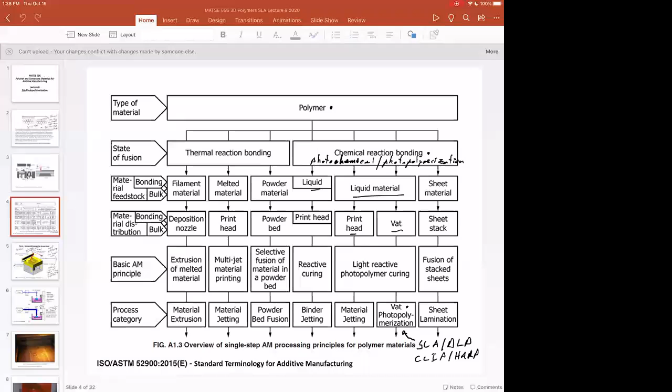So we started VAT photopolymerization last time. Remember where VAT photopolymerization lies on the ASTM diagram. And of course, we're going to call this SLA once in a while, or you'll hear DLP, or you'll hear CLIP or HARP if you look up Azul. There's lots of interesting ways that people are approaching this, but we're using liquids and we're using light reactive photopolymer curing. That's the thing that ties this whole section together.

So we watched a couple of videos last time. We'll watch a couple more videos this time, getting oriented to what this topic is. But this is now the type of chemistry that you should at least be conversant in, in order to understand what we're doing here.

And this is the same or similar to polyjet. We talked about polyjet printing or material jetting in terms of the Stratasys or Objet technology for that. So this is very similar UV activated acrylate photopolymer curing.

Rather than discussing TG and TM and the thermal transitions of the polymers, what we're going to talk about is this idea that you can go from liquid polymers or liquid resins, you shine light on them, they undergo free radical polymerization, and you eventually end up with a solid. Because in general for organic materials, unless they crystallize, or unless you're talking about crystalline small molecule organics, liquids will be low molecular weight, and sometimes we also call them oligomers.

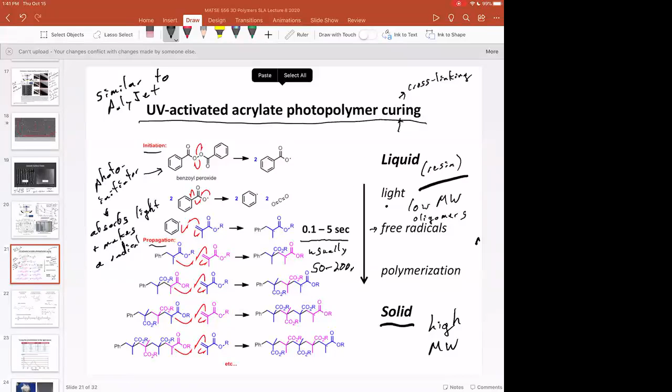And in order to do effective vat photopolymerization 3D printing with this chemistry, this has to happen quickly, usually 50 to 200 milliseconds. That's all the light is on for, and we'll see some... oh, hold on.

Well, Zoom is having issues today too. Let me go back. All right, let me try this. Oh, let me share my screen first. Well, this might be an interesting talk without any slides. Let me see if I can get back to what's going on. Maybe it's a PowerPoint issue. Bear with me.

Okay, one more time here. Always something new. All right, screen broadcast is going. There's the PowerPoint. Okay, well, must be one of those things. But anyway,

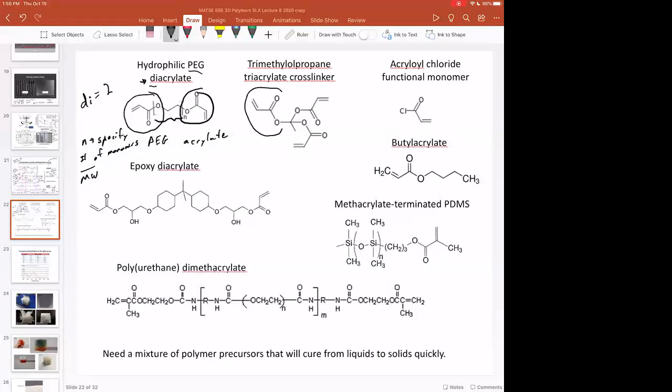So here you have a triacrylate, and anything that has more than 2 functional groups on it is going to cause a lot of cross-linking. You get cross-links with diacrylates too, because you grow polymer chains from both ends like this. But you're going to grow lots of polymer chains. They're going to come together and cross-link polymer chains together in the network. So we tend to call those cross-linkers.

And you see the molecular weight in the center here is not very high. So this serves as a gelation center or as a cross-linking center for whatever chemistry we choose.

Here's, well, acryloyl chloride is special because it doesn't look exactly like an acrylate, but that chlorine functions a lot like the oxygen. So that's a functional monomer. Butyl acrylate right here, it's the same thing. Epoxy diacrylate, this thing right here, comes from epoxide ring opening, so that starts to look like epoxy.

You have silicones, so PDMS is silicone. And then you also have a lot of different methacrylates. Methacrylates have this methyl group right here. We're not going to go deep into the polymer chemistry, but methacrylates react a little bit more slowly than acrylates do because that methyl group slows things down a little bit.

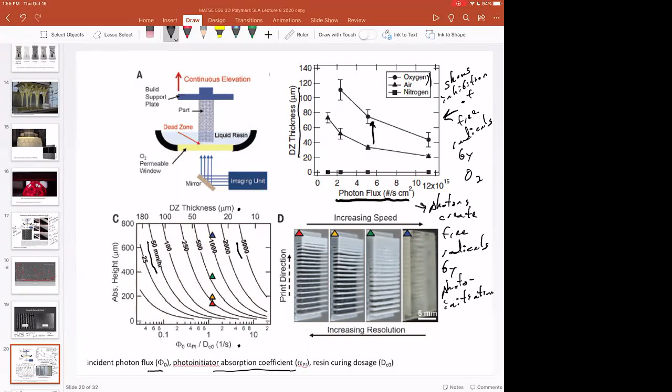The photoinitiator absorption coefficient is related to how many of those photons are going to be turned into free radicals. Because just because you shine light on something doesn't mean you get any free radicals. You have to absorb that photon, that photoinitiator needs to break apart, it needs to form a free radical. There's an efficiency that goes along with that. But you have your highest photoinitiation efficiency where the absorbance of the molecule is the highest.

And so the other cool part about photoinitiators is you see that the max absorbances can move around. And you know that you can tune lasers or laser diodes to match photoinitiator absorbance.

So that's very interesting. If you have an SLA printer, say with a purple-violet diode that illuminates at 405 nanometers, you just need to find a photoinitiator that absorbs at 405, or at least close to it. Maybe 384 is close enough, although you'd have to check it out.

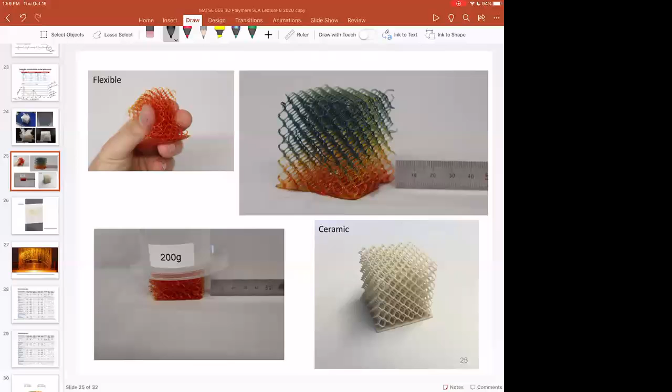So these are just some examples, so you can check out these. These examples are from my lab, where you can formulate flexible resins, you can formulate ceramic resins, you can do lots of different stuff. You can even add additives. If you want to check this out, this is a photochromic where you shine light on this, and I think Locke might have made this in my lab, but this is cool because you can do lots of different things with these resins.

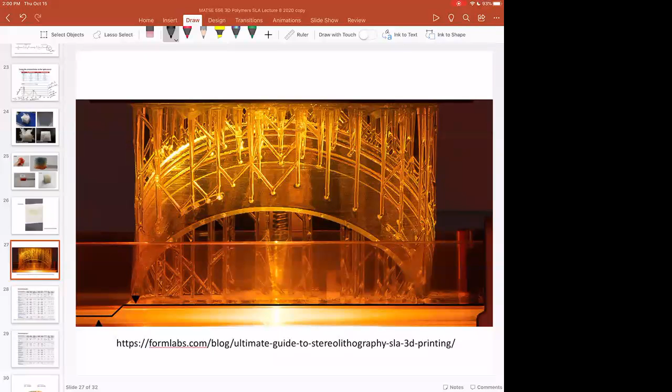And so we're going to talk about these resins, and there's lots of good guides for how to do SLA printing and what's available from industry, because these resins in some cases are difficult to formulate. New resins are difficult to print on whatever SLA technology you have, but it turns out, just like we studied 10 or 15 different polymers in the thermal polymerization, in the thermal 3D printing part of the class, there's at least that many resins, if not dozens of resins that are available in the marketplace for SLA. So you can check out the online guides.

And one cool thing about this is if you look up what's available for 3D Systems SLA printers, they have a really nice section on all the different strengths, hardnesses, etc., heat deflection temperature, which of course is not quite the same thing as TG, but it starts to get related to TG for their stereolithography setup. And they sell these resins under designations like ABS Light. So there isn't a single molecule of ABS in any of these resins, but the properties of these resins that are made using photopolymerization, the hardness, the modulus, the flex, etc., is similar to ABS.

And lots of people are familiar with the properties of polycarbonate or ABS or polyethylene, etc. We sort of have a sense, if you've worked with plastics, you have a sense for what the properties of those thermoplastics are like, because we use a lot of thermoplastics to design parts right now. But when you get into UV polymerized resins, it's difficult to say that this is an acrylate polymerized resin that has a mixture of a few of these different monomers and the properties are like this. You really want to compare it to things that people know about. This is silicone-like, or this is polyurethane-like, or ABS-like.

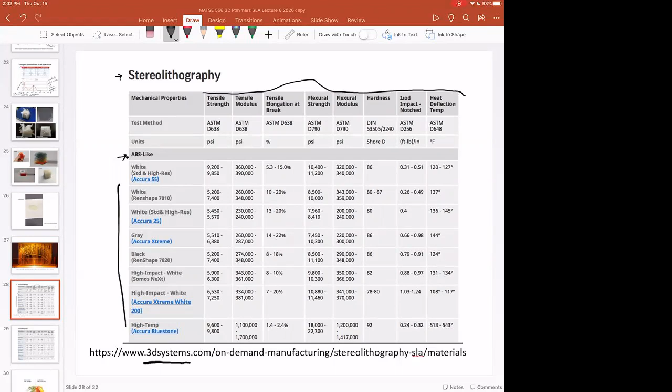And so what these 3D printing companies have done is they've really tried to build families of resins. So you can see all the different types of resins here that have similar properties to ABS. They've really tried to benchmark these to thermoplastics that folks are familiar with. But all of these are different liquid resins. They probably have 20 or 30 different components, and we'll talk about a lot of those different components other than just the oligomer mixture. And they have the validated properties here, so you can do your material selection.

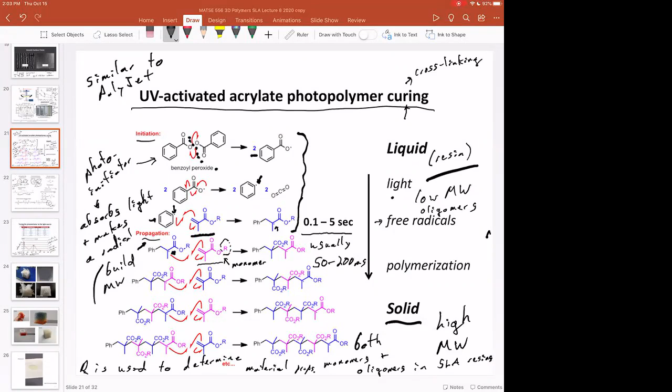So this is polypropylene-like, polycarbonate-like, polyethylene-like. That's really interesting - they're selling these cross-linked photopolymer resins described to be like thermoplastics, because we don't really encounter a lot of these types of materials, acrylate polymerized cross-linked resins. It's hard to describe what their properties are other than maybe silicones, which are usually cross-linked, and epoxies, which are cross-linked. So my message on slides like this is don't get confused. We're not going to have oligomers of polycarbonate, polypropylene, or polyethylene. We're not using acrylate photopolymerization to polymerize polyethylene or polycarbonate. We're really using other chemicals as a stand-in to give us properties that are like things we're familiar with.

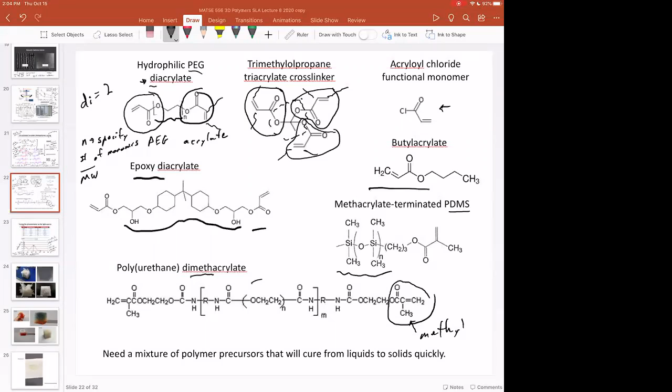And the exceptions are PDMS, silicone - we have to use silicone, but we can make PDMS oligomers, and some types of epoxies and polyurethanes. As we investigate different types of SLA materials and look into the recipes for a lot of these compounds, you'll see things that start to look familiar. But we're not making polypropylene or polymerizing polypropylene using photopolymerization - it's a stand-in. So I hope that was clear. Are there any questions on that?

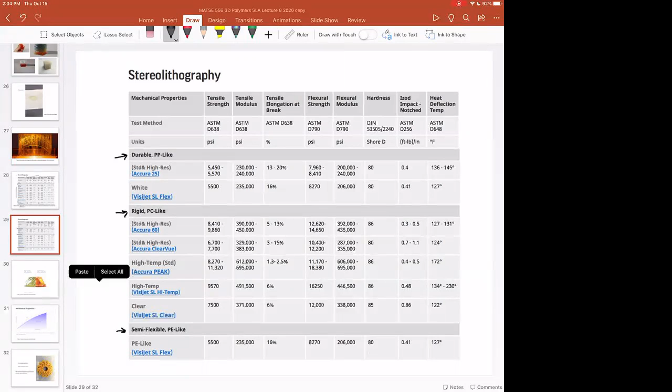For those of you interested in the details of the materials, we'll get there, so hang on, but this is just setting us up here to understand the ecosystem of that photopolymerization. The other thing we're going to talk about is post-processing.

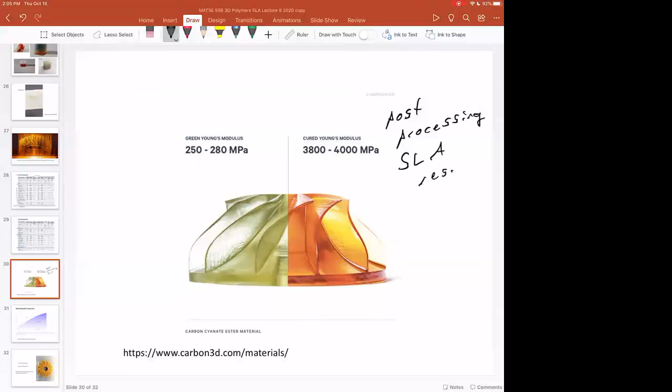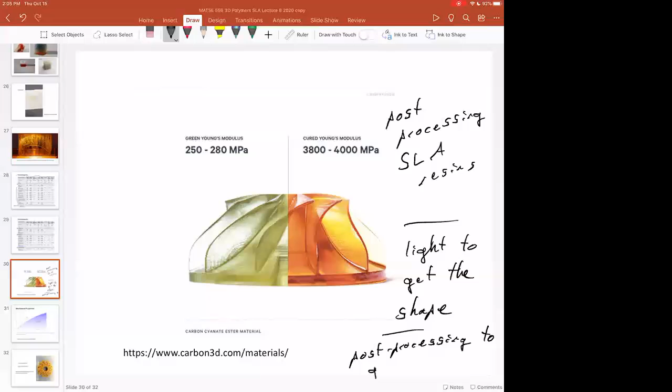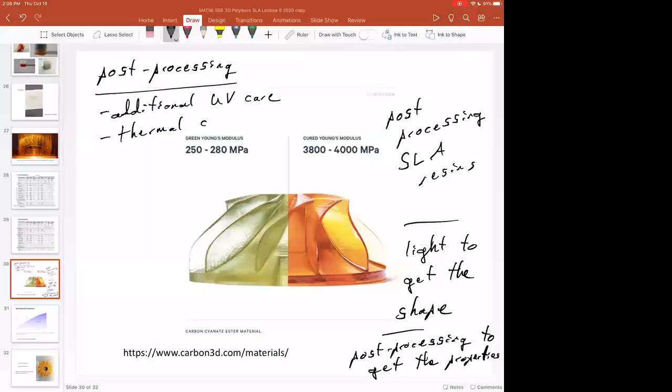And so what Carbon always says is that you use light to get the shape, and you use post-processing to get the properties. And post-processing can be additional UV cure, thermal curing, washing, etc., a combination of the above. And this is one really nice example right here from Carbon's website.

So they're using what's called a cyanate ester. We'll talk in detail about this chemistry because it's known, but what happens is they take this cyanate ester - this is the green part, so this is after UV. After UV, we have a green part, called a green part because it's still green - not treated like green wood or something, or a green body of a ceramic. And then this is after thermal. The UV photopolymerization that we just talked about activates all the acrylates and allows us to shape a three-dimensional object using acrylate photopolymerization, just like any SLA process. When we thermally cure the process, we take that shaped part, put it in an oven, and the thermal cure activates the cyanate ester chemistry that's not UV active.

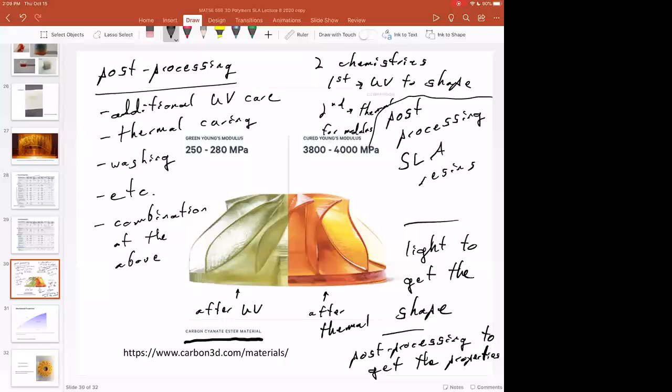Why people are interested in cyanate esters is that they have very similar stress-strain curves to GFN, which is glass-filled nylon. Glass-filled nylon is an automotive material - they put the glass filler in to decrease water absorption and increase strength, but it's an engineering material that people are interested in. Here you see strengths on the order of 100 megapascals and reasonable strain to break, although relatively brittle because cross-linked materials are in general going to have low strain to break.

Any questions on this before we move on? Like I said, we'll come back to this and talk about post-curing and dual cure materials, but I want to introduce the concepts to get people thinking about these things as we go forward. Any questions or discussion points? All right.

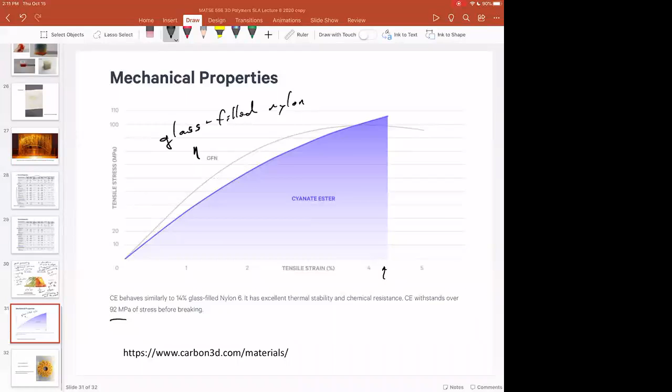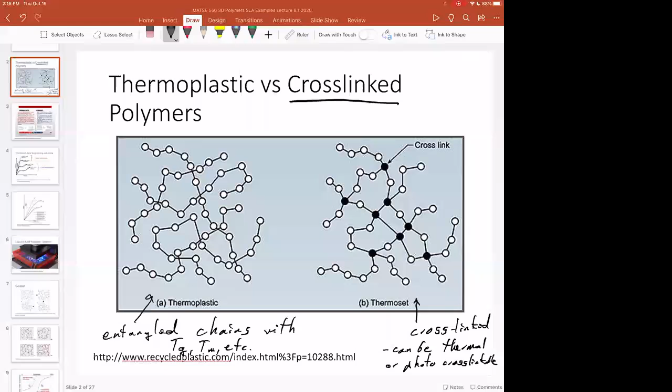And so these cross-linking reactions can be thermal or photo cross-linkable. Just depends on what chemistry you're using and how you're going to tune that reaction. And so we're going to talk about how that process occurs.

So in general, thermoplastics are finished polymers. They're made at a chemical factory and they're processed into pellets. That's the standard for injection molding. It's the standard for blow molding. We've talked a lot about thermoplastics and how they work.

There's a lot of thermosets out there, especially like epoxy thermosets that you are probably familiar with. Lots of thermally cured silicones are thermosets as well, or RTV. So if you've ever used an RTV silicone or an RTV polyurethane, that stands for room temperature vulcanizate—that's a type of thermoset. As a matter of fact, rubber tires are thermosets as well because they're cross-linked. And so there's just a different type of how the chains are interconnected, and that can lead to different properties.

And of course, the big issue with thermosets is that they're difficult to recycle. You can't remelt them. You can only grind them up and recycle them as a ground polymer powder. And that's actually one of the biggest disadvantages of rubber tires. As you know, it's really, really hard to recycle tires. We tend to grind them up and make athletic tracks out of them or playgrounds or something like that. But there's only so many athletic tracks that we can make, and there's just massive tire dumps. It's a big waste problem that hasn't been addressed. But anyway...

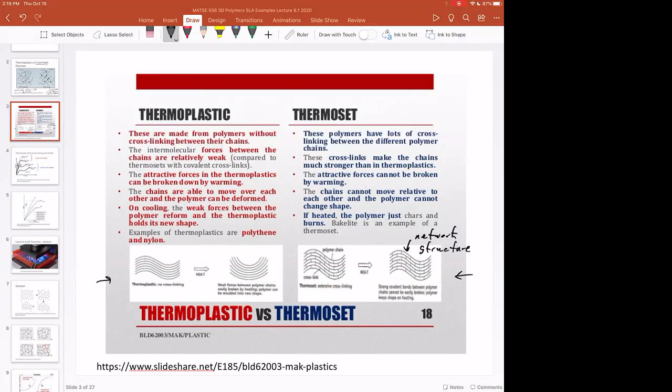And so that leads to a longer strain to break, or higher strain to break, in thermoplastic materials. Whereas thermosetting materials, because of the cross-links or because of this network structure, those chains can't slide past one another. That's why they're called thermosets, and that's why they can't be recycled. They tend to be more brittle materials and tend to have lower strain to break.

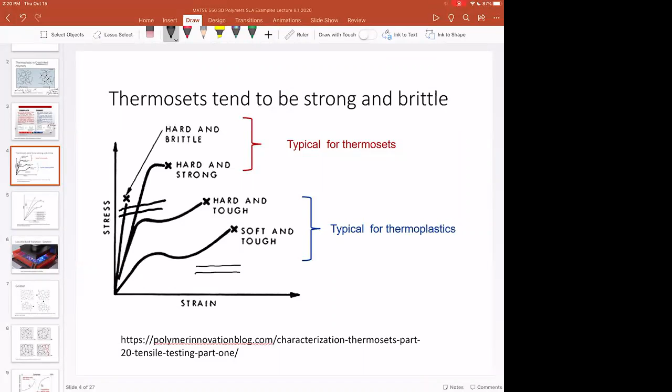So of course you can adjust the oligomer recipe in order to get flexible thermosets, and we'll talk a lot about flexible materials. But if you compare apples to apples, similar chemistry between thermoplastics and thermosets, the thermosets tend to be more brittle. But you can't shape thermoplastics in general at room temperature and get things you might like to use in engineering applications. And so you can do room temperature processing of thermosets and get engineering parts. It's a trade-off, just like any sort of engineering design or material selection problem. You need to know the different aspects of the different materials and then make your selection that fits the requirements.

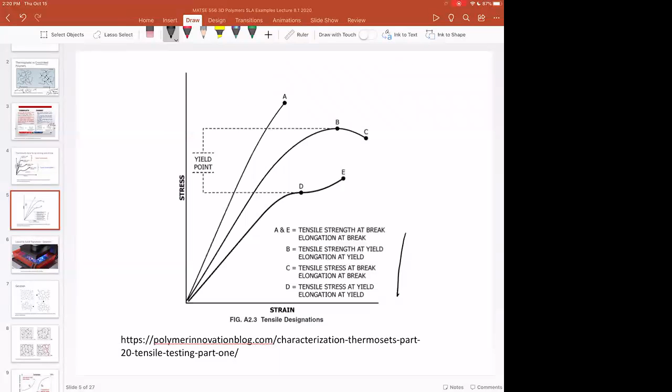And so if you haven't studied a lot of mechanics of materials, or haven't studied your mechanical properties recently, this just defines strengths, elongation to break, yield, etc. These are just some vocab words you might be interested in having in your nomenclature, so you know what all these properties are on the stress-strain curve. So that's just an aside.

I'll pause here. Are there any questions?

Okay, we're going to watch a couple videos because there's a couple things that we missed in terms of describing the different processes. One of them is this video, and we're going to see exactly how this printer is operating in terms of the raster scanning to write the different structures. We'll compare that to a DLP carbon type printer where you see the whole layer being illuminated at once. So let me see if Zoom will cooperate here and allow me to show this video.

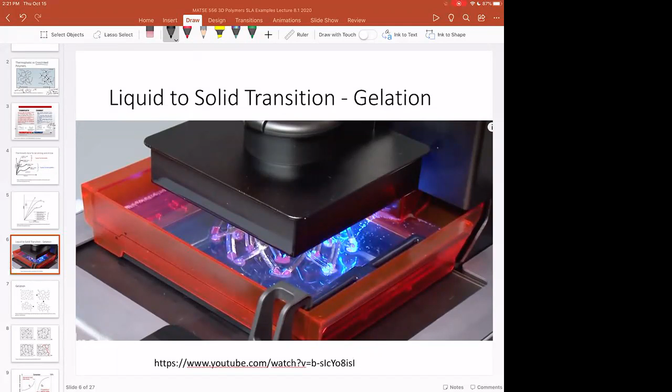So first we'll talk about the Formlabs printer. There's a couple key features of this. If you've never seen a Formlabs printer working before, this will give you an idea of what's going on. So let me start this video here.

From CNET, this is a first look at the Formlabs Form 2 3D printer. This is the second version of a printer that was initially conceived and funded from a Kickstarter campaign.

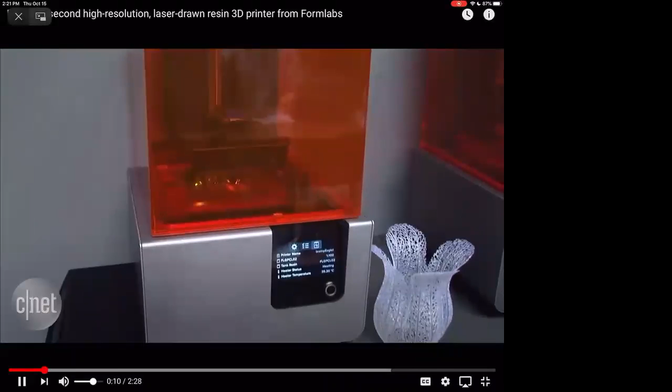Okay, so the first thing that you see is that you see the light moving around on the print bed, and that's the raster scanning. So even though there's some reflection and some smearing of the light, this is a point source laser that's about 300 microns big in X and Y, and that's moving around, drawing in the different components of this part. So that's one thing to pay attention to.

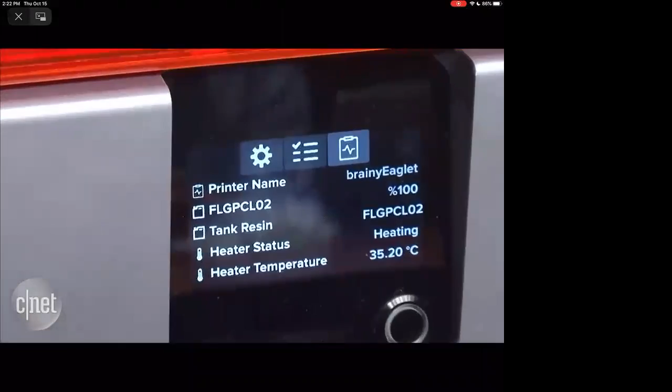Back in 2012, the company was founded by a couple engineers and designers from MIT who raised $2.8 million to build the first.

So the second part is you just saw the printer lift up the part from the window because this is bottom illuminated. It's going to wipe the window. It has a wiper to make sure it's nice and clean and there's nothing sticking there. And then it's going to put the part down exactly 100 microns away from the window to allow resin to be now between the window and the part, to illuminate the next layer.

But today, thanks in large part to the feedback from the Kickstarter community, and of course years of research and development, Formlabs is back with the Form 2.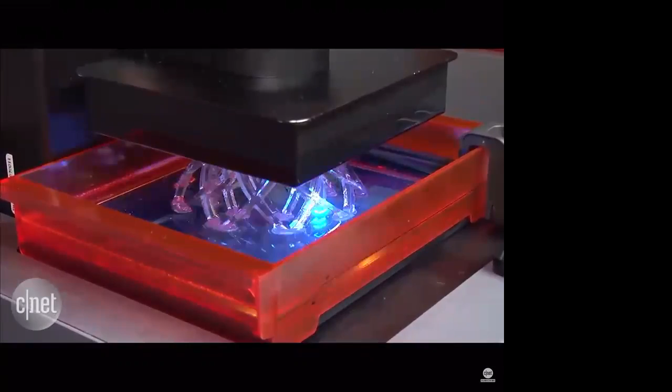Now this one is very different from most of the 3D printers you see on the market. Okay, and now you just saw the tray slide. The tray slides first before the part is lifted off to break the suction at the interface, and then it'll be wiped, and then it'll start again.

So let me just back up a second here. You'll be able to see all the different stages of this wiping, writing, and sliding of the tray to break the suction.

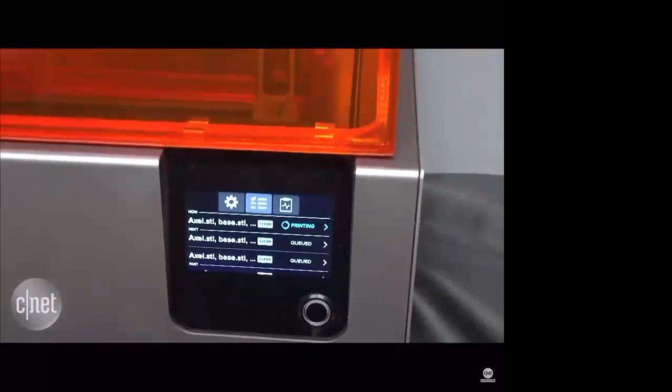Those models operate kind of like 2D printers, but instead excrete molten hot thermoplastics from an actual print head. The Form 2, however, continues Formlabs' stereolithographic model. Stereolithography was actually the first 3D printing technique to be invented, and it uses a Blu-ray laser that traces part of the model image onto the surface of a bed of liquid resin.

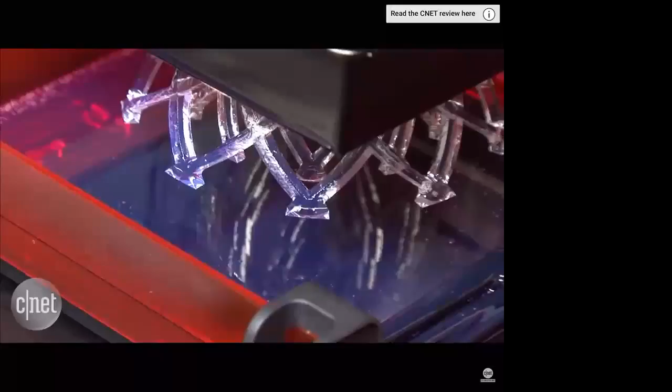As complicated as that sounds, I checked out an early look at the model at a briefing last month with the Formlabs team, and it's actually a very simple process for the consumer. You just unpack the printer, install the removable print tray, and insert one of the new resin cartridges directly into the machine like you would any ink cartridge on a 2D printer.

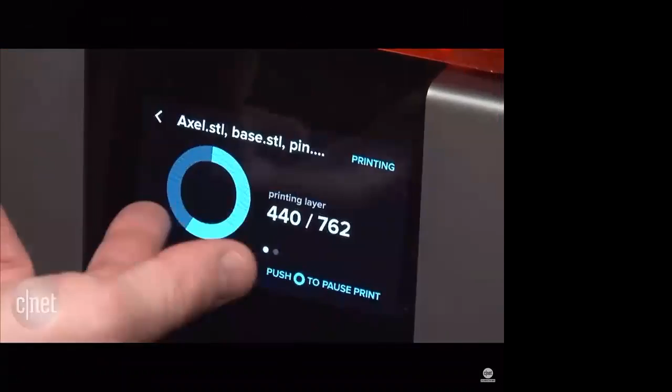The new model even adds a touchscreen display for managing print jobs and a Wi-Fi connection that'll automatically send progress updates to mobile devices, in case you want to step away from the printer for a while, or if you're planning to share it amongst several users.

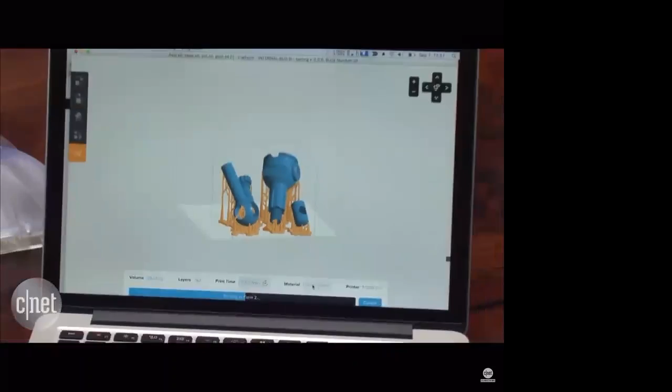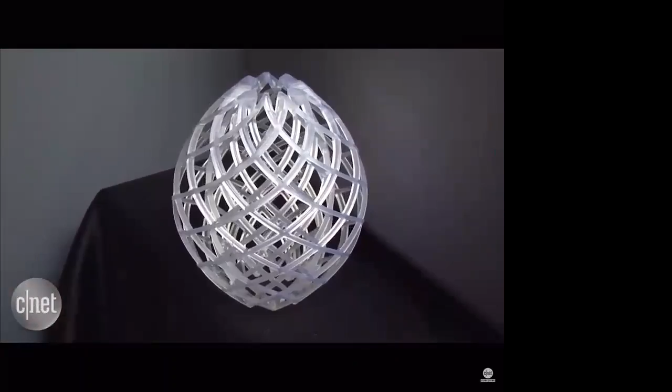So why stereolithography? Well, one thing is that these printers can add a level of detail that standard fused filament printers can't, whether you're printing something big or something super tiny like a ring. The ultra-high resolution also does a good job at hiding the individual layers of plastic from plain sight. You can barely even see the lattice pattern formed by the plastic layers, which really makes it seem like the objects were cut from one solid piece of plastic.

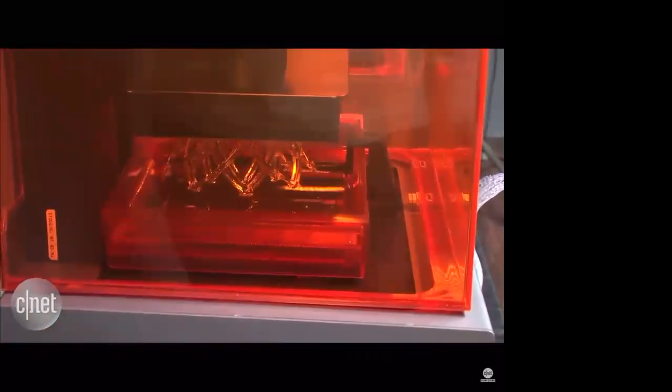You can buy the Form 2 right now for $3,500, which includes the 3D editing software, resin, and a finish kit for post-processing. You can read more details about the upgraded Form 2 in the full first take, but that's going to do it for me.

Okay, so we have that printer, and that's very interesting. Let's compare that to the short video of the Carbon printer to give us an idea, especially how the different printing routine works in terms of what the printer looks like as it's printing. So let's see how this goes. I think there's a little talking, and then they'll show some prints.

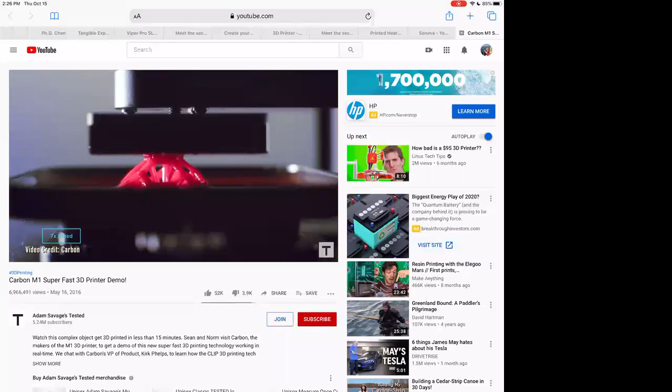Hey Sean, you remember that video that made the rounds on the internet last year from TED about 3D printing? The CLIP technology, from the company Carbon? It was a video of a piece being printed out of resin that basically looked like it was just coming out of the resin, like super speed. Oh my God, and even though it was time-lapse, about 7x, it was much faster than any of the 3D printing technologies we'd seen before. Yeah, it seemed like black magic.

Right, and well, we are here at Carbon where we're going to get a demo of their actual machine, the M1 printer. Super excited. Me too. Let's go check it out.

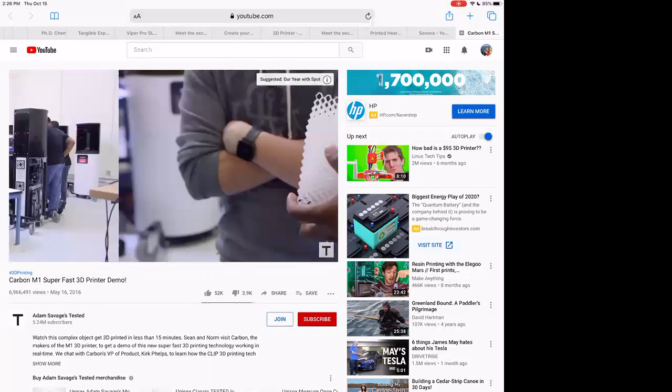Hey Kirk, it's great to meet you. Nice to meet you, we're very excited about this. So this is it, this is the M1. Yes, our first product. And it uses Carbon 3D's CLIP technology, which we saw videos of online. Yep, it's gone everywhere. Can you describe a little bit about what's going on, what the machine encompasses, and how it differentiates itself?

Okay, so what you can see in this is that the light is not flashing like it does in the Formlabs printer, or raster scanning, so it's not moving around. This is a total 2D exposure. And even though this is sped up a little bit, this shows that there's no wiping step. You get a relatively smooth pull of the part.

So this is cool because they're showing it in clear, and the image is changing in the projection here. That's, of course, how you change the part. But this is a lot different physics of the process compared to what we saw with the Formlabs printer.

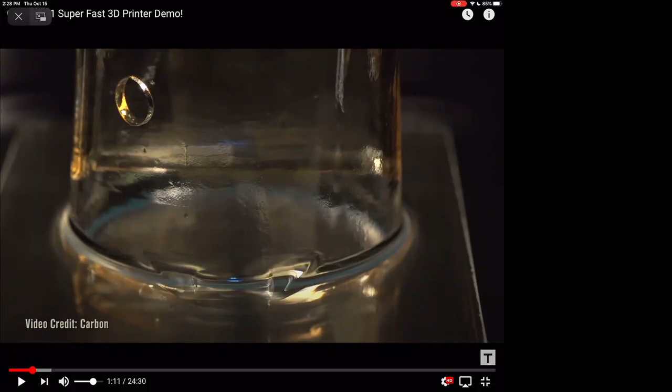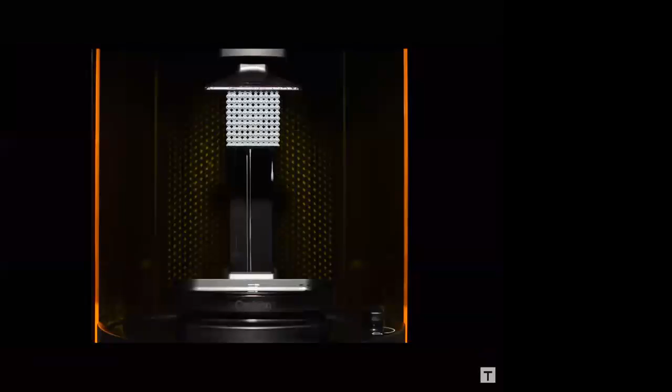From other printers that use resin? Sure, so our technology, CLIP, for Continuous Liquid Interface Production, is a fundamental advance in 3D printing. And what it allows is for us to print very fast, without layers, in engineering materials. So all that together allows us to work with people who want to make real parts for production, as opposed to just for prototyping. Right, which you can do also, prototyping.

Correct. So continuous printing, how does that happen?

We've seen SLA printers where a laser goes layer by layer, and then there's a scrape process, and over many hours you get an object. SLA has existed for 30 years, and it's great for prototyping. Our founder looked at SLA and realized there was a bug that could be a feature. He realized you can get rid of layers if you control not only light, but oxygen and light together. Up to this point, the SLA industry has thought of oxygen as the enemy, but if you make oxygen your friend, you can remove those layers and go much faster using a wider range of polymer chemistries.

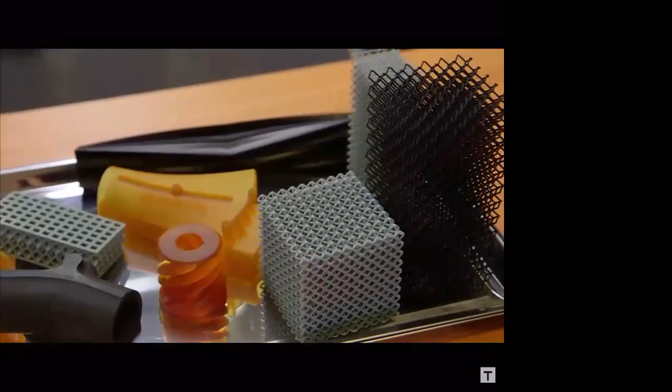Oxygen is something that inhibits the curing of resin. A light turns your liquid into a solid, and oxygen prevents that from happening. If you use sophisticated software to modulate the effects of both together, you can make amazing parts. We're using UV light, the same UV light used in other SLA approaches, but it's the combination of light and oxygen that allows this magic to happen.

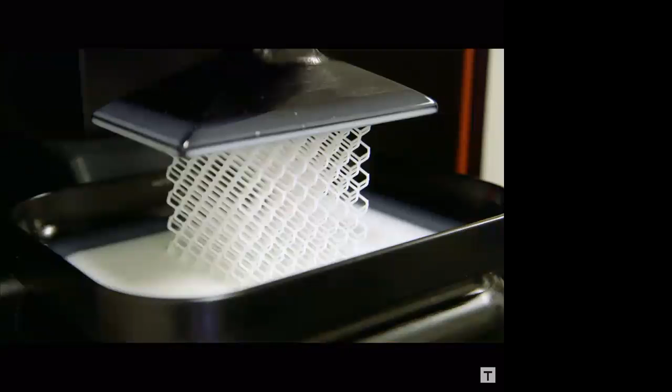To do it continuously, are you drawing the outline of the print, or is it all at once? Underneath, down in the cabinet, we have something very similar to a high-performance desktop projector. We're projecting an image, like playing a movie. We take your three-dimensional structure, take its cross-section, and project that cross-section into the bottom of this liquid vat. Then, controlling both the light and the oxygen, you can get rid of those layers and make awesome parts. So it's basically like a DLP projector.

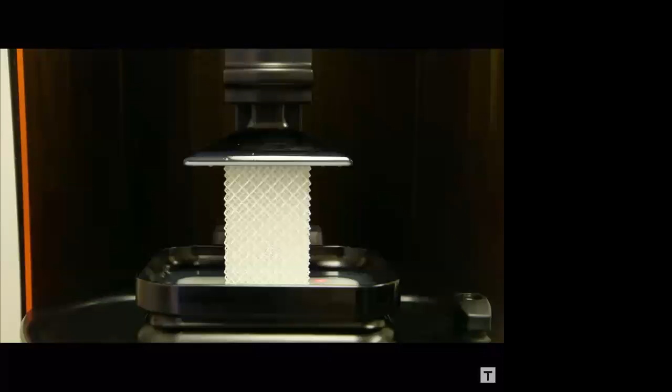That's exactly right. The software still does slicing of traditional models, so you think of it as a cross-section like you said, but instead of drawing the outline or the infill, it's just projecting that all at once. Does that also inform the bed size?

We are launching M1 to get CLIP out into the world, because we've got engineers, designers, and business people who want to use 3D printers to change the products they make and the businesses they run. Imagine you want to get rid of your spare parts warehouse, all these plastic parts just hanging out waiting for someone to need a spare part for your 2006 Toyota Matrix, which is the car I drive. That's a bummer, having to hold all those spare parts in inventory waiting for Kirk to call when he needs a new door handle, which is a problem I had just this morning.

So instead, what you want is a production quality 3D printer that can make that part at an appropriate quality for me to use in my real life. That's what this machine is about, and we're really excited to show it to you today.

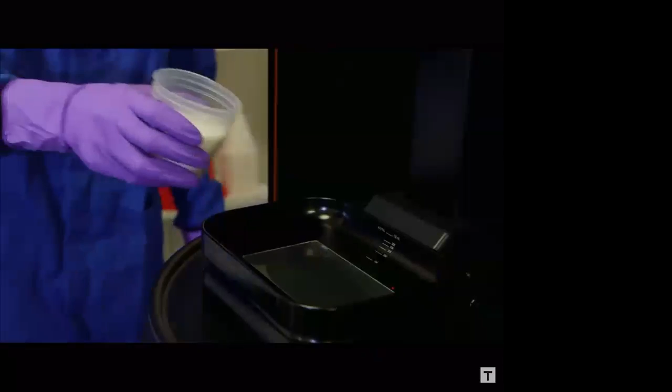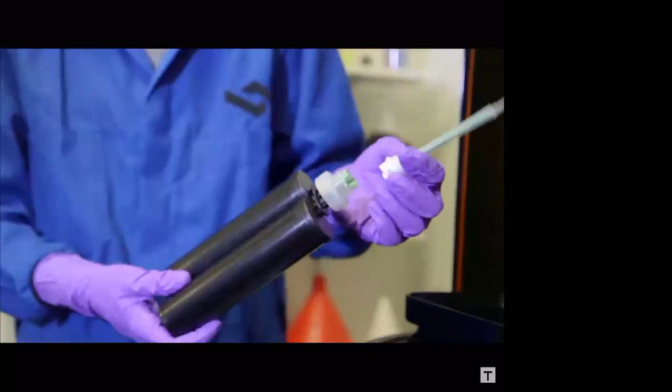I think the best way to illustrate it is to actually get the demo started. The resin you have going here is your prototyping resin, which is the fastest printing one. We have a wide range of resins, some for final parts and some for prototyping. When people are making real things, they go from concept, an idea, to a final product, and along that process there are many different resins you might want. You might prototype first, then understand the model and its geometry, then go to production in a high-quality engineering resin.

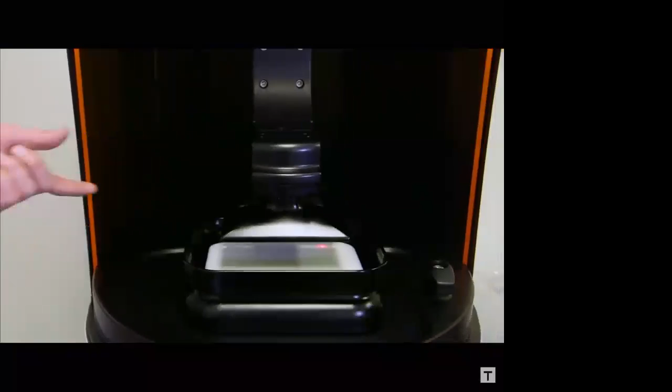So what's happening right now: this is the build platform, and it's descending into this liquid puddle of resin. The light, when we get down to the bottom, will project into the bottom of this pool of resin. Think of this as a small fishbowl, a container of liquid with a transparent bottom surface. We're going to project through that transparent bottom, and using our physics and chemistry model, control the oxygen and its interplay with light. Now you can see the build platform has descended into the pool, and underneath, our optimized projection system is projecting UV light into the bottom, projecting the cross-sections as we build the object.

So the object is being built right now. You just can't see it because it's underneath the surface of your pond of resin. So Kirk, this is super exciting. Yeah, and this whole process with this model and this material is going to take about 15 minutes, you said.

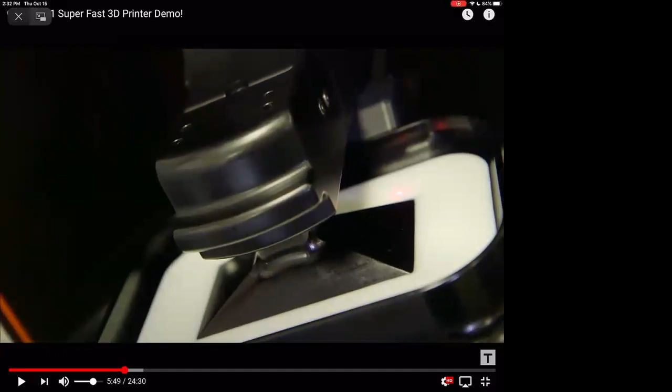I'd love to use that time to ask you more questions about the technology. Great, let's do it. Okay, so you can check out the rest of that video, but that gives you a lot of interesting information on what carbon is all about.

Oh, I don't know what's going on here.

What carbon is all about and how their technology compares to other SLA or photopolymerization type technology. The rapid printing has been figured out. What carbon is really good at now is the different materials, because they're polymer chemists with a polymer chemistry focus, they're good at using different oligomers, formulating different materials and getting really desirable properties. We'll talk about that as this PowerPoint slide comes up.

Let me see if I can get this going. One sec, bear with me.

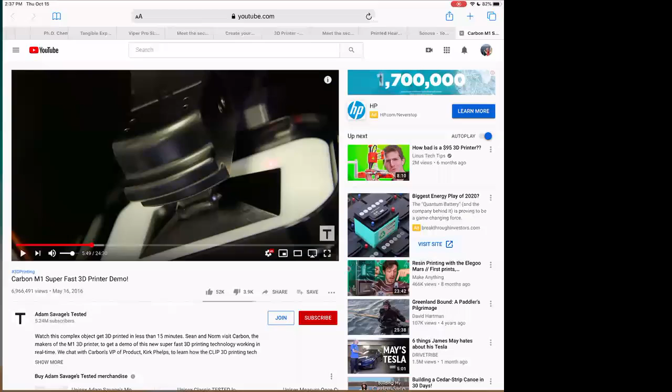We'll cover that next time since this PowerPoint isn't coming up. I want to show this video from EnvisionTEC about applications and what you can do with SLA, from one of the application notes. We'll talk about different applications for 3D printing technology as we go further. This was a nice complement to thinking about what we can do with 3D printing at large scale. Let's watch this video and see if PowerPoint comes back to finish the class. This shows you what you can do now with a 3D printing factory and how it's transformed an industry. Let's check this out.

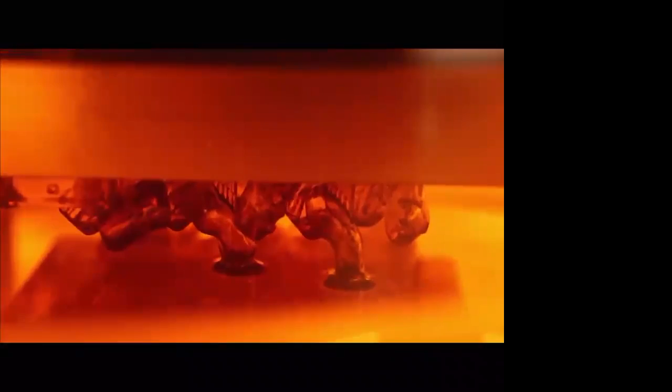It's great to help people hear better. Sonova is the largest hearing healthcare provider in the world. From this facility, they serve Phonak and Unitron brands. There are over 500 employees; it's a lean manufacturing facility. At Sonova, we envision a world where everyone has the ability to live a normal life, even with a hearing impairment, because of the kind of products we supply. What we produce here isn't just a product or a widget, but an individual custom-made item that someone will wear on their body, making a huge difference in their life. This all ties into the technology we use to produce it. Together with EnvisionTEC, we collaborated intensively to bring this cutting-edge DLP technology into on-demand manufacturing and rapid prototyping, and we've done that successfully.

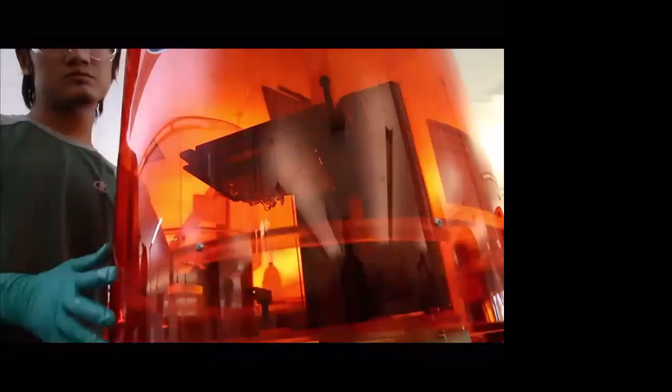This is truly cutting edge because we're producing all of our products by 3D printing. We needed to ensure that when we went 100% digital manufacturing, that we had a process that was easy to use and operate and produce very consistent shells.

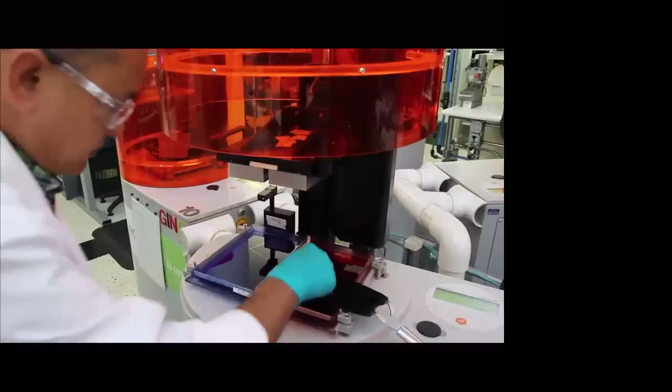We have over 100 EnvisionTEC printers across the globe. We produce over 1 million shells a year. Each shell is customized for each patient. We've been using EnvisionTEC machines, I believe, almost 15 years, and it's been a very, very successful experience for us. We are able to build blue and red material colors in one printer, and it helps our process flow much better.

We have completely transformed the way custom hearing aids are made today. Our customers, the hearing healthcare professionals, take a silicone impression of their customer's ear. That impression is then sent in to us with a set of order instructions for what kind of hearing aid they want. That impression is then scanned so we can capture that digital image. That digital image is then moved to a modeler.

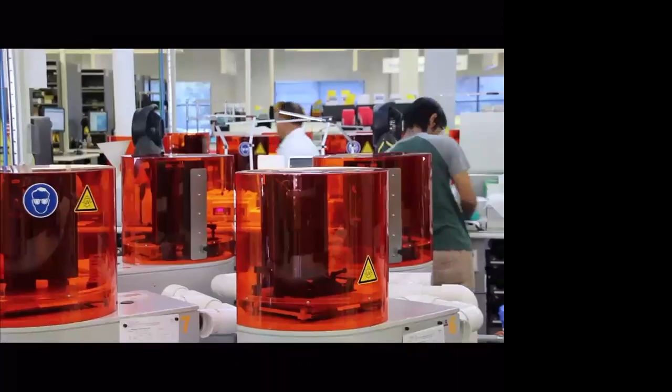The modeler now is designing not only the shell or the part that's going to fit in the ear, but they're laying out all the components inside that hearing instrument. We pass that then into what we call our shell lab. That's where our EnvisionTEC 3D printers are. A build is created. The digital printer simply forms that shell.

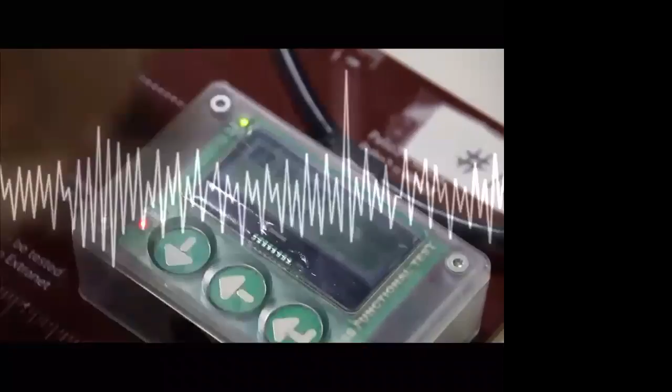When that's finished, we pull all the parts for that instrument, and in production, they take that custom-made 3D printed shell, take the electronics, mate those together and seal that. After that is completed, it passes through a couple of different QC steps, including a full electroacoustic testing. Once it passes all that, it's ready to ship out to our hearing healthcare professional customer, who then fits that on the actual user of the device.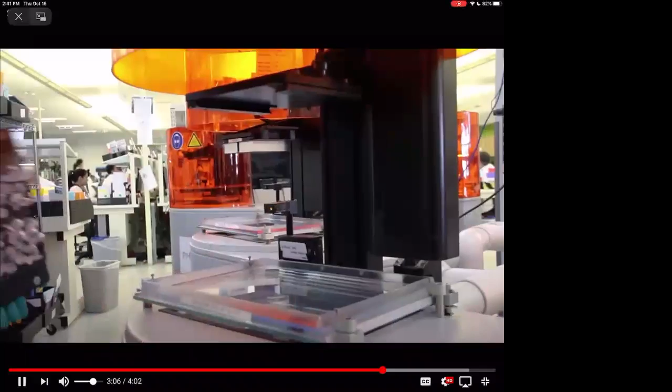I'm very proud that we were the first to believe in that technology because we believe this will be the cutting edge, the greatest and the best and transformational way of making hearing aids. The products we provide to people are really making a difference in their life every day. So getting a hearing aid is a big deal.

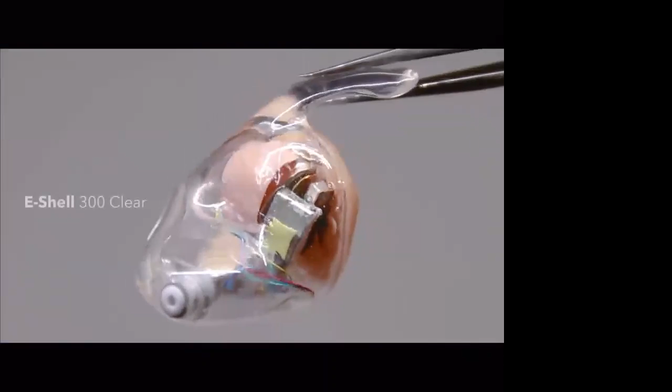Today, EnvisionTEC technology is the standard in our industry. So the patients feel better. They're getting smaller hearing aids that fit better, that are retained in the ear better, that last longer, that have cosmetic appearance that's acceptable to them. It's a great cause to help people improve their hearing. And that's what we do. We help people hear better and live the life without limitations.

Oh, hold on. All right, let me see if PowerPoint's back. Oh, it's not. One more try. All right, one more try on screen broadcast here. All right, we're looking for 8.1.

So after these couple lectures, you should be starting to get familiar with SLA and the relationship between the types of printing routines used versus the types of materials that are possible. Then we'll talk about how to put those together, what properties are possible with this type of technology, and ultimately how we might apply this technology to different applications, whether it's medical or hearing aids, as we just saw. So 10 years ago, there were no 3D printed hearing aids, and now 95% of the hearing aids out there are 3D printed, or whether it's jewelry or food applications or other applications of SLA.